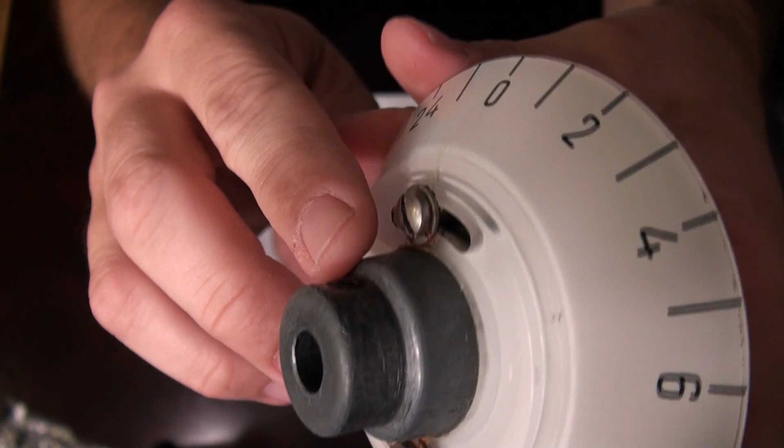But if you can see real close on this part, see if we can get it to focus, there's a lot of scratches and scoring going on there. So it looks like over time the original knob has been slipping on this part. So that's why I want to change the geometry and the machining of this part a little bit. This is more than likely cast aluminum.

So the first step for this project is we have to model just slightly this piece here so we can generate some quick CAM code to machine this part to look the way we want. And then we'll CAD 3D model the new knob that will go on here, CAM it, and machine it. So this will be our first episode. Let's head down to the office and we'll jump into Fusion 360 and start doing some CAD work.

Let's do some 3D modeling. So I have Fusion 360 open. I just set up a new file, so we got a new project going. So the first thing that we're going to do is we're going to model the lower piece, the existing piece that we said we want to modify slightly.

Now while I'm doing this, I'm going to go real slow, real methodical. I'm not going to use any shortcuts. We're just going to use all the menu bars and icons. A lot of people gave me some feedback asking for a video like this. A lot of the other videos on YouTube, the people go real fast and they have a hard time following along. So I'm going to talk through what I'm doing so you have an idea of my thought process and how I'm doing it within the CAD environment.

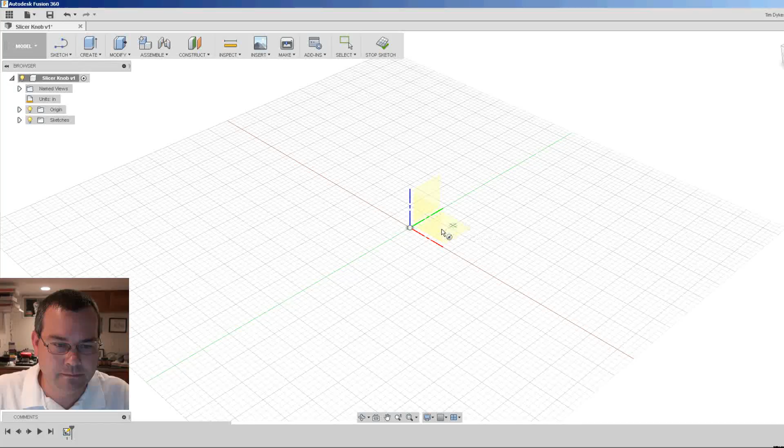So cylinder, it wants to know a plane that I want to make that cylinder on. We're going to make it in the XY plane. And then it wants to know a reference point. So I'm going to put it at the origin. Now it wants to know a diameter of that cylinder. So our diameter is 0.9 inches.

And now it's going to ask me how tall do I want my cylinder. So I'm going to draw this in the negative side of the XY plane. And then when I draw the knob, I'm going to draw the knob on the positive side. So that's why I'm doing this negative. So my first part of my cylinder is minus 0.450 inches tall. Okay, so we just made a body.

Now, once we have a body, we want to do this create component. You always want to try to work inside of a component in Fusion 360. And you can think of a component as just a mass of bodies that are glued together. Kind of like if you're building a house with Legos, the house would be the component, and then all the bodies would be the Lego bricks that are all stacked together and snapped together.

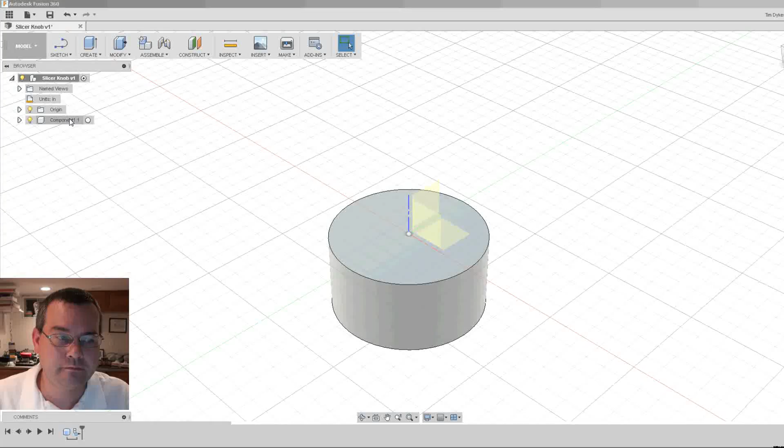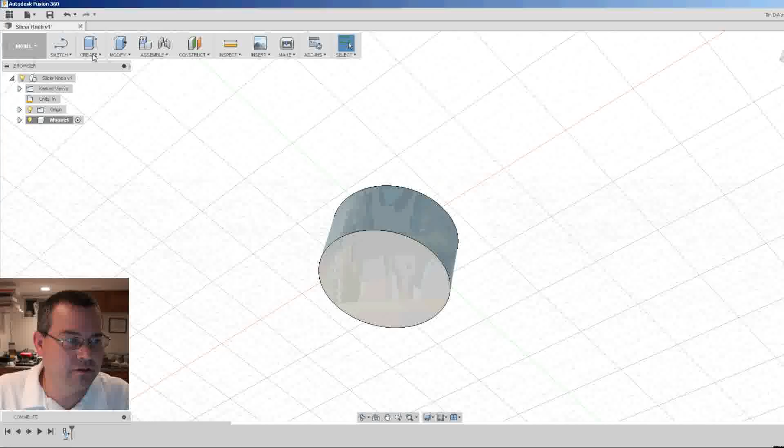So we made a component. I always like to name my stuff. So we'll call it the mount. Oops. Come on. And we spelled it wrong. Okay, so we'll call it the mount, and we're going to make this our active component. So now any changes we make will all reflect in this component. So that's the very top of the mount.

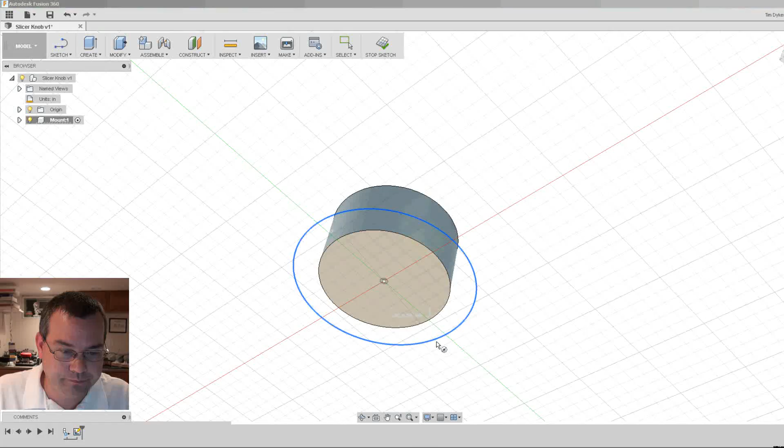Now what I want to do is I want to tack another cylinder onto it. So I'm going to say another cylinder, and I'm going to select this plane of the other part, and then I'm going to go to the center again. And then just like before, it's going to ask me for a diameter. So the lower diameter of this part is 1.25, and then again it's going to ask me for a height. So the height's 0.6.

Okay, so that's as much as I really need to model to properly represent the mount. Now, one of the modifications we're going to make is we want to put two flats, one on each side, so that we have a good way to engage the knob that we're going to make to apply torque to the shaft. That way, we don't have to have any set screws or keys or anything like that, and this will be quick and easy.

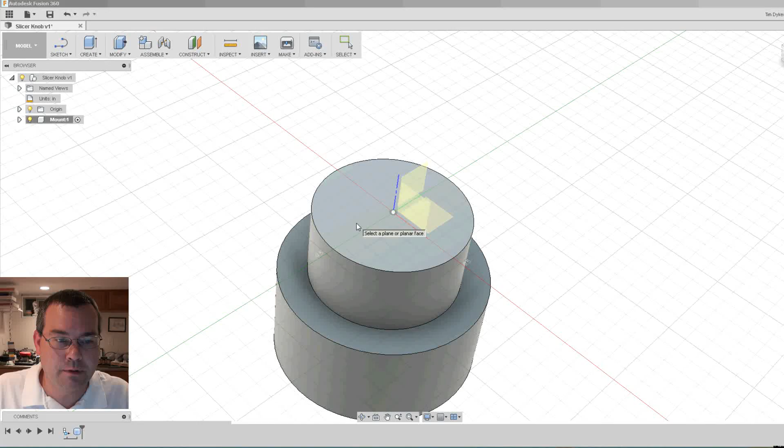So in order to do this, I'm going to create a sketch. Now a sketch, for the purpose of this part, is just a two-dimensional drawing that you can make on any plane. So I'm going to sketch on the top of this cylinder that we made. So I'm going to go to sketch, create a sketch, and then it's going to ask me what plane do you want to create that sketch on. And I can select one of the cardinal planes of the file, or I can select a plane on an existing body or component. So we're going to select this.

Now notice it kind of highlights it and changes a little bit. Okay. Now we're sketching on the XY plane, and this sketch is associated with the plane of the top of that cylinder. So we're going to draw two lines here. I'm going to draw a center line first. So I'm going to say sketch line, and there's a whole bunch of shortcuts we can use. I'm not using them on purpose because I'm trying to get people to follow a little bit better.

So then we're going to say this top edge, and then we'll go all the way down here to this bottom edge, and we're good. And then we're going to add a constraint, and the center point is now coincident. Okay, now constraints sometimes give people a hard time to understand. What a constraint is doing is you are describing some relationship from one object to another. The easy ones to understand are parallel and perpendicular. So if you have two lines, there's two ways that you can describe the relationship between those lines.

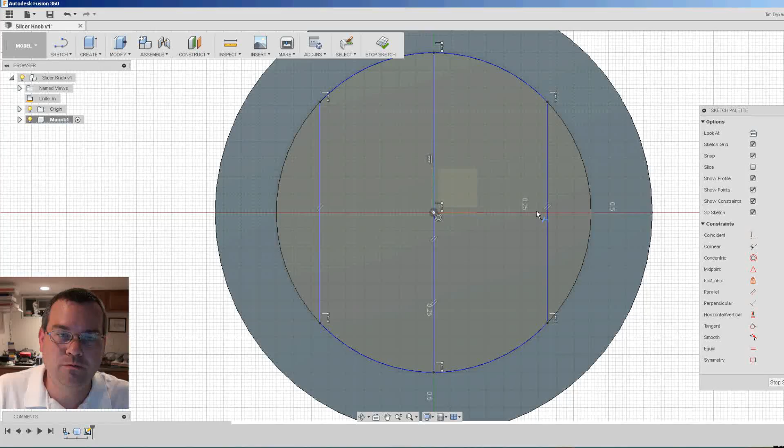I'm going to draw a circle here, and I'm going to make it the same as the other one. So sketch, we'll do a circle, and we'll just do a 2-point. We're going to select the center here, okay, and then we'll go all the way out to here. Now, the bad part about doing it that way is that if I change the dimension of the cylinder, then the sketch geometry won't change because they're not linked. So that's why we typically would use the project.

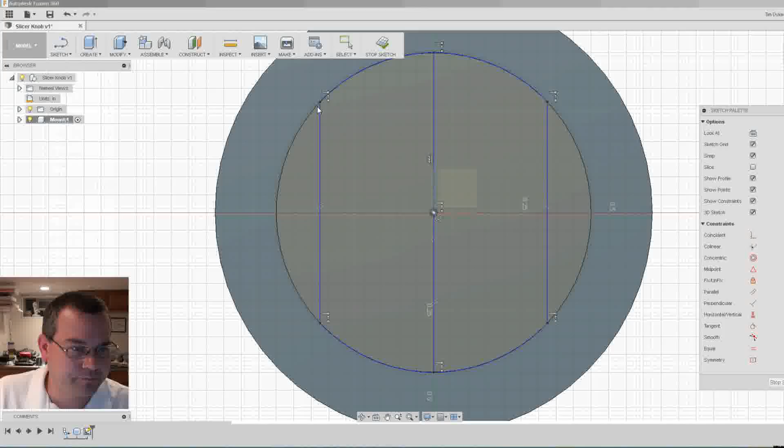Okay. Now the next thing I want to do is I just want to do some trimming here. So I want to say sketch, and I want to say trim, and I'm going to trim this line and this line, that line, that line. I'll trim this. Basically what I'm doing is I'm forming, now it's warning me that I'm removing constraints as I'm doing this. So now what I did was I generated the shape that I wanted for that piece to look like.

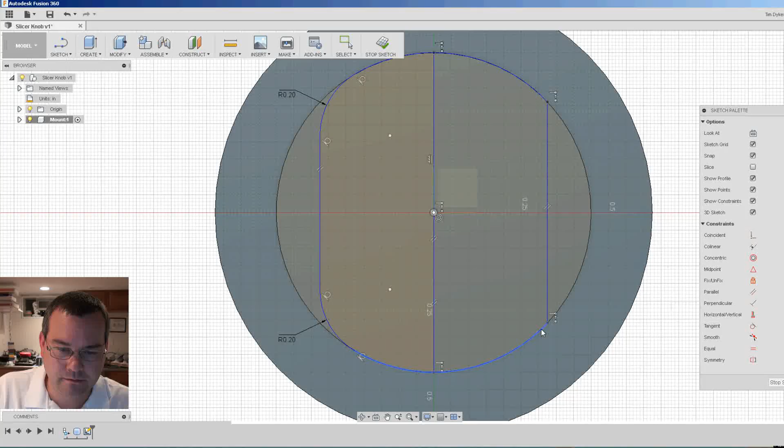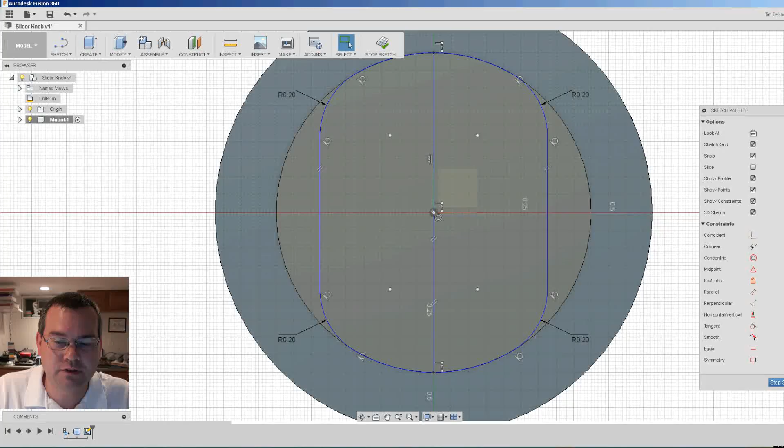Now the other thing I want to do is, because I'm going to make a mirror image of this as a pocket, I can't machine square corners inside of it. So now what I want to do is I want to say fillet, and I want to go from here to here, and then I want a fillet of, what did I say, 0.4? No, 0.2. Okay. And then we're just going to put 4 fillets on. And what I'm doing is I'm right clicking and saying repeat.

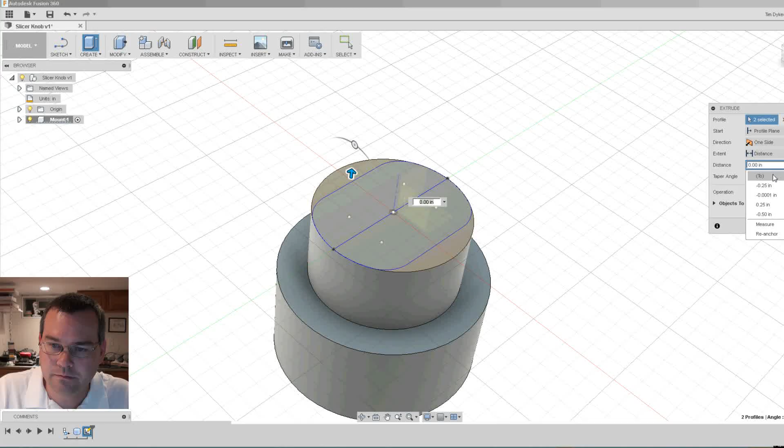And the reason why I'm using a fillet of 0.2 is when I make the other part of this, I'm going to use a 3/8 inch diameter end mill. So 0.2 will allow me to get in this corner without having 90 degrees of engagement in the tool and it chattering. Okay, so now I've got the shape drawn that I want, and this sketch is now complete. So I'm going to come over here and I'm going to say stop sketch.

Now what I can do is I can say create extrude, and I can select this, and then I can select that, and we can say cut, and then under distance we can say 2, and I want to cut it to here.

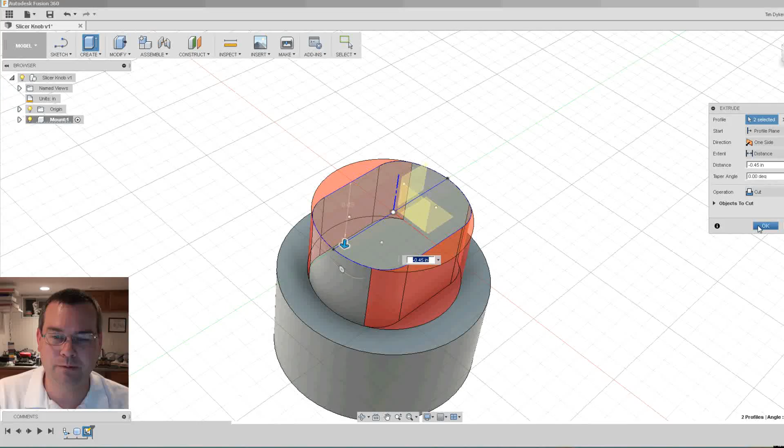Okay, now what we're doing, the first part of this part was we were adding material. We were making a cylinder. We made 2 cylinders that were put together. Now what we're doing is we're taking the cylinder that we made and we're cutting it. Now you could have done this the opposite way and drew the larger cylinder first and made a sketch on it, and then drew what you wanted and extruded it and added material. Here we're cutting it away.

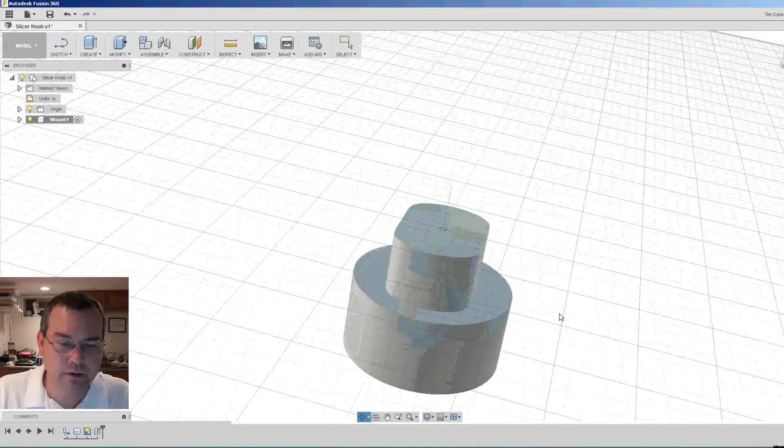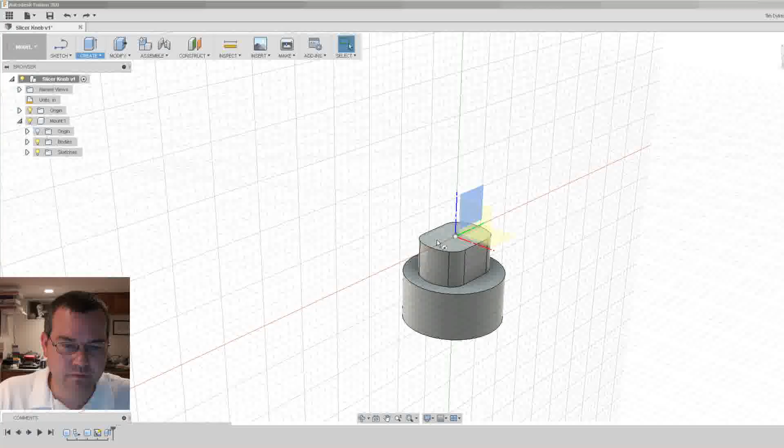There are so many ways that you can 3D model these parts, and there's no right way. There are some better ways and some not so good ways. The really good 3D modelers will make it so that you can easily change dimensions and change parts and modify parts and grow parts without having to do a lot of editing. Okay. Again, I'm just kind of trying to give you a starter and showing you exactly what I'm doing here.

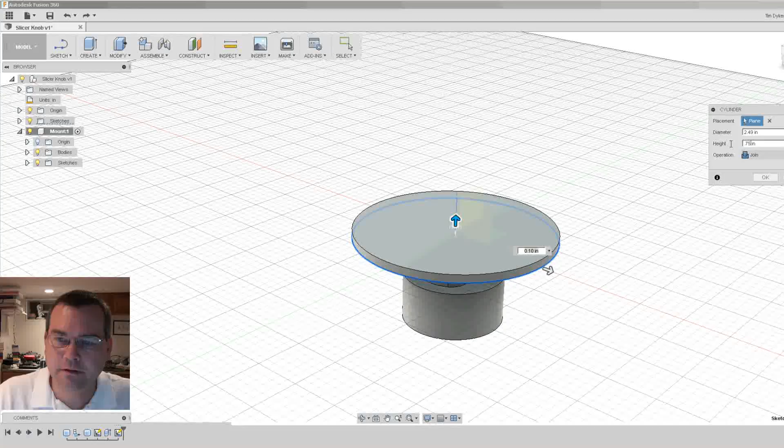Okay, so we'll do our cut. So now that will conclude the part. That is all I need to model for the knob part that this is going to mount to. And this is enough modeling where I can CAM it and we can, you know, do the machine work necessary. Okay, so that concludes the first part.

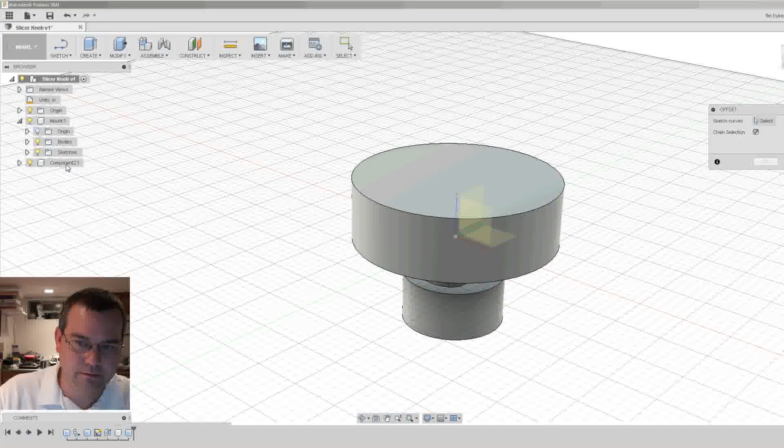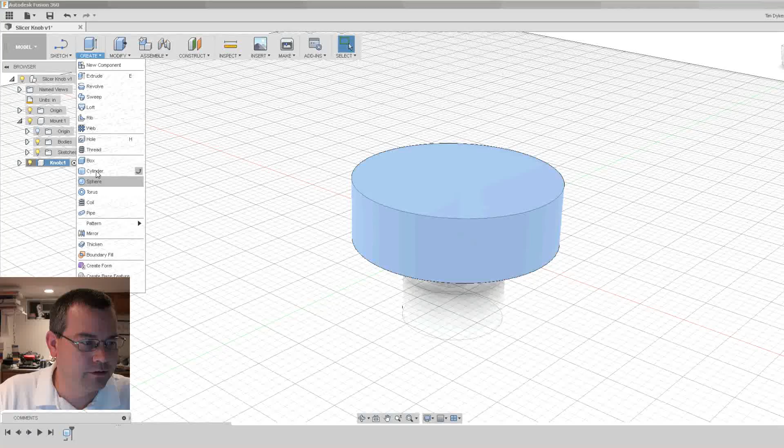Now we'll actually go and model the knob. Now this part's going to be more complex. So I'm going to start the knob the same way that I started the mount. I'm going to create a cylinder, and we'll select the XY plane again, and then I want the center to be on the origin, and then the initial diameter wants to be 2.49. Okay, and then the height wants to be 0.75.

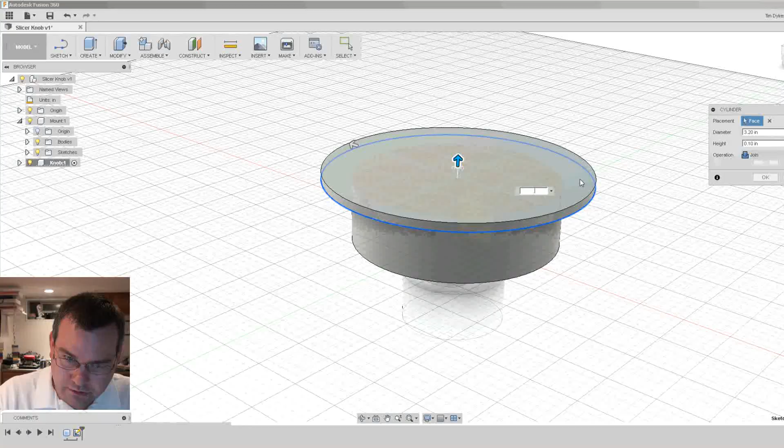And then under the operation, what I want to do is I want to create a new component. So I'm telling Fusion 360 that this is not part of the original component that we were making, the mount. This is going to be a brand new component. So click OK, and now over here you'll notice that we have a second component. So let's name our component. We'll call it knob. Okay. And then we want to make it active, because we're going to be actively modifying this component.

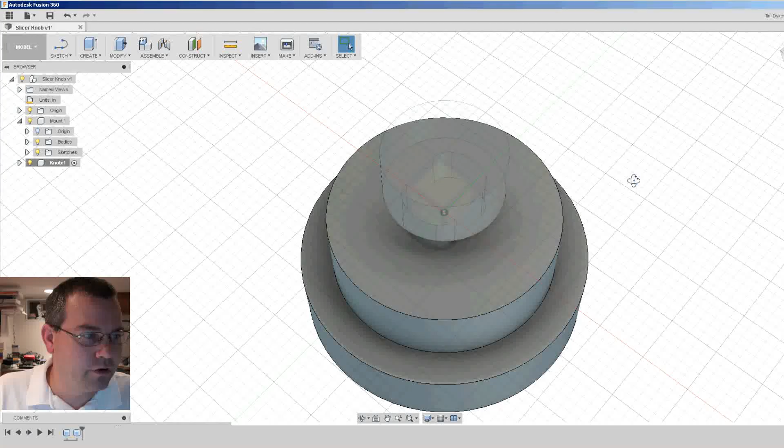So now I'm going to do the same thing I did last time and create another cylinder. This is considered direct modeling, and we're going to put it on the face of the first one and in the center. And then the diameter of this will be the total diameter of the knob. We're going to go with 3.2. And then the height of this cylinder is also going to be 0.75. So that'll give us a total knob thickness of 1.5 inches. So then there is the general outline of our knob.

Now we have to do a couple of things here. We have to fix up the bottom and make it so that it will go on to the mount that we previously modeled. And then we also need to fix up the top here and make it so that it's a little ergonomic and you can turn it easily. So let's start with the bottom first. So I'm going to create a sketch, and the sketch plane is going to be the bottom of the knob.

And then on this sketch, see how it's showing a shadow outline of the first component? That's really nice, because then what we can do is we can say P for project, and then we should be able to select the outline of this knob. There we go. Okay, and then we can hit OK.

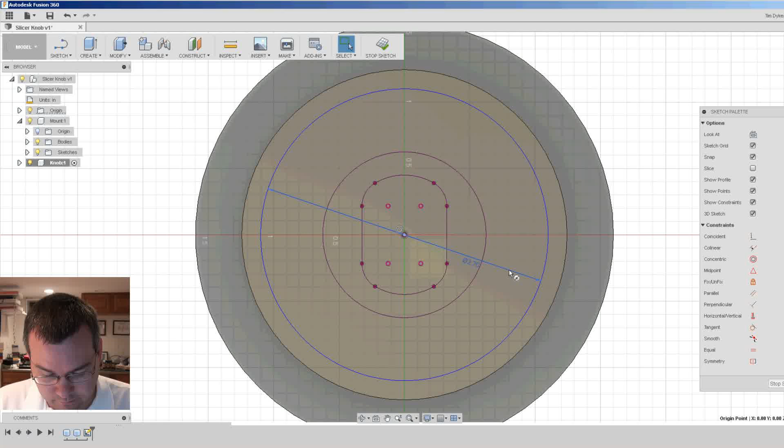So then what we did is we took the drawing of the previous part that we made, the mount, and we projected that geometry onto the bottom of our knob, so we don't have to redraw and redimension that. And if we change the original sketch and the original part, these projected lines will also change with it. Okay, so they're linked. That makes maintaining and modifying your designs much easier going forward. So that's why you want to use this project command.

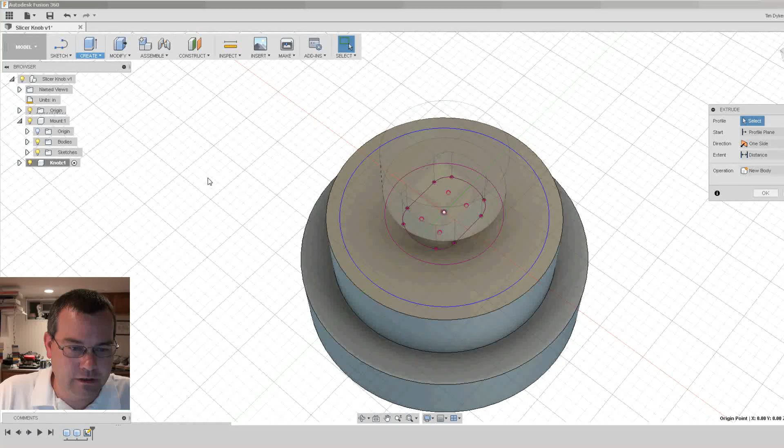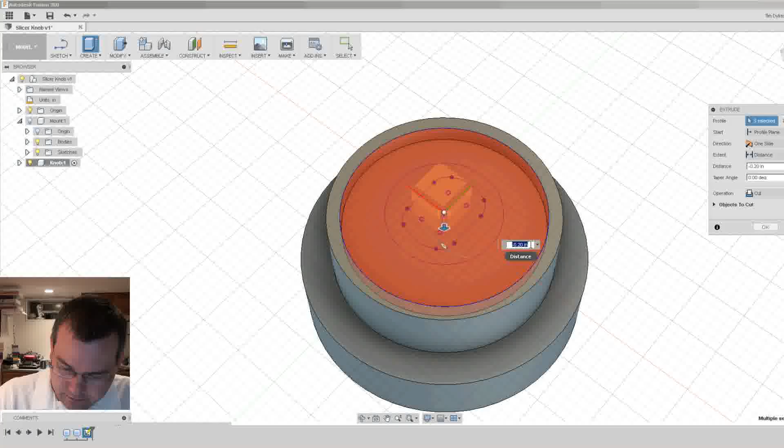So then once we have that projected, that's part of it, and we also have to put a very large recess into this knob. So we'll make a circle, 2 point, and we're going to put it at the center again in the origin. And then the diameter of the recess is 2.2 inches. And then this will make it so that it slides over the lip that's on the mount, so that it'll mate nice with it. Let me just double check that dimension. Yep, that gives us a little bit of clearance.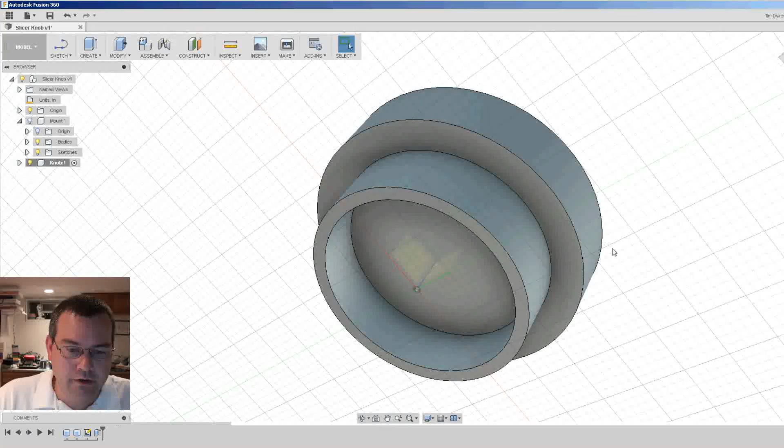Okay, so that's about it for this sketch. So the bottom is pretty easy. You can see how projecting made our lives easy. So now, once we have this sketch, we're going to do another extrude. So create extrude, and here, let's make this component disappear. We want to extrude the whole piece, and we're going to cut. And we are going to cut a dimension of 0.625.

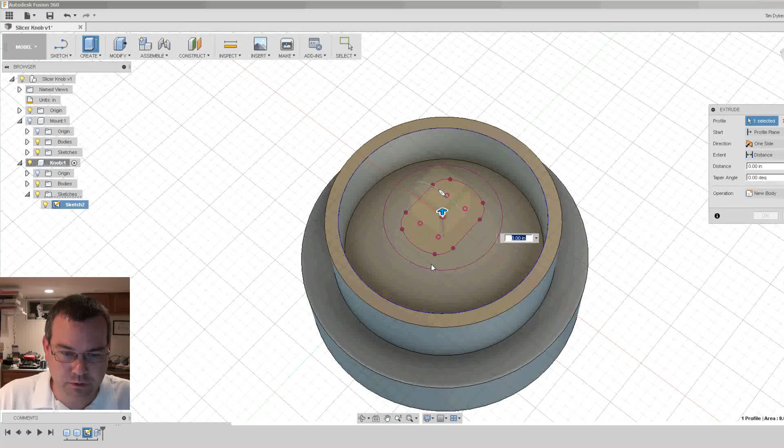Okay. Now what that will do is that gives us the recess for the two set screws that hold on the plastic indicator with the numbers on it. That holds it on to the mount, the metal mount part that we're going to machine. So now once we do that, if you notice, the sketch disappears.

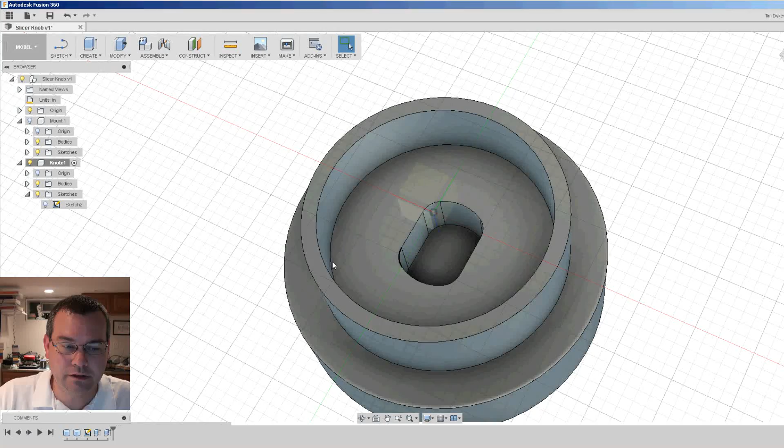Now we still want this sketch because we need to do a little bit more work on it. So if you expand down here to sketches, you'll see that we have the sketch here. We can make it show back up by turning it back on. And now we want to extrude this part here. So let's do another extrude. Create extrude. And now we only want to extrude the center part.

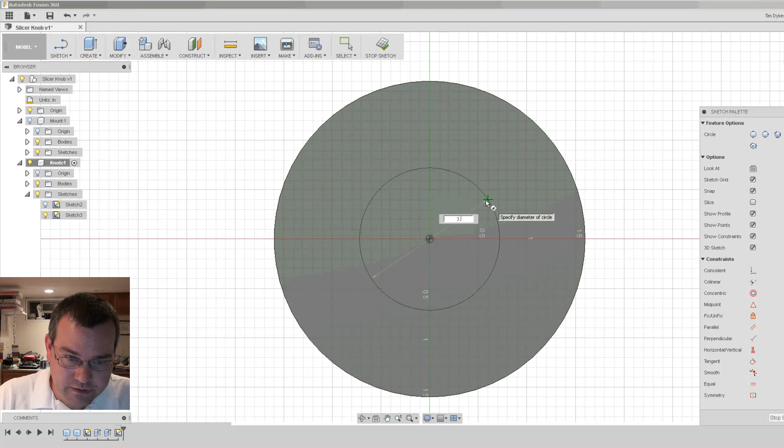Now, you got to be careful of your measurements here. We're extruding it based on this bottom surface here, not the first extrusion. So this one needs to go down minus 1.125 inches. Okay, so you can see now how we can turn this sketch off so that we can see just the body. So you can see how very quickly we can transfer the geometry from one part to another without having to redraw it at all.

And then with the radiuses that we put in here, we'll be able to easily come in here and take this pocket out with a nice 3/8 inch end mill. We'll be able to reach down in there. Okay, so that's pretty much it for the back side. So now let's do the top. Okay, so I'm upside down on the top, so I want to turn the part around so I'm right side up. This makes life a little easier.

Now I'm going to do another sketch. We can do as many sketches as we want, and you can put them on all different planes. A lot of people have trouble doing angled holes when they're first starting out. That's where you have to get creative and make what they call construction planes. And then you can make a sketch on that construction plane at any angle. It can get pretty complex. We're just going to sketch right on the top of the part again.

And then here's where it gets a little complicated. So I want to put a nice number of scallops on the OD of this knob. So the first thing that I want to do is I want to draw a circle. So we'll sketch circle. We want to lock it to the center. And then this circle, I already figured out all its dimensions ahead of time. This wants to be 3.6. Okay. So now that's our circle.

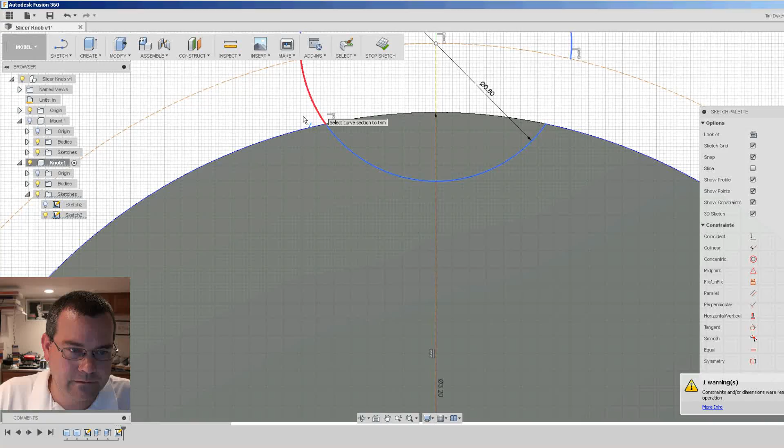And then what I want to do is I'm going to draw a line just as a reference from the center of the circle up to the upper edge of the circle. And then notice it automatically put constraints in for me, so it centered it, it made it vertical, and then it made it coincident. So that gives me the starting point of where I want my scallops to start.

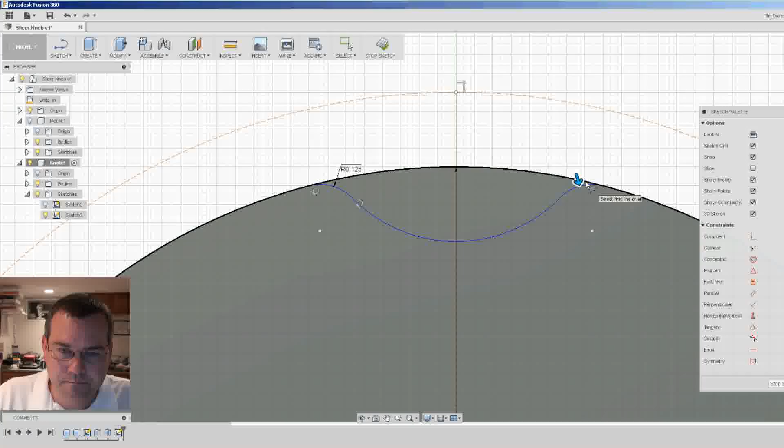So now I want to do another circle. So we'll go over here, we'll say circle, and this circle I want to be right here, and I want it to be 0.8 inches in diameter. The reason why I want it to be 0.8 inches in diameter is I want to use a 3/4 inch end mill to carve out these little scallops, and it's always good to make your diameters a little bit larger than your end mills so you don't bite in and chatter when you hit the corner.

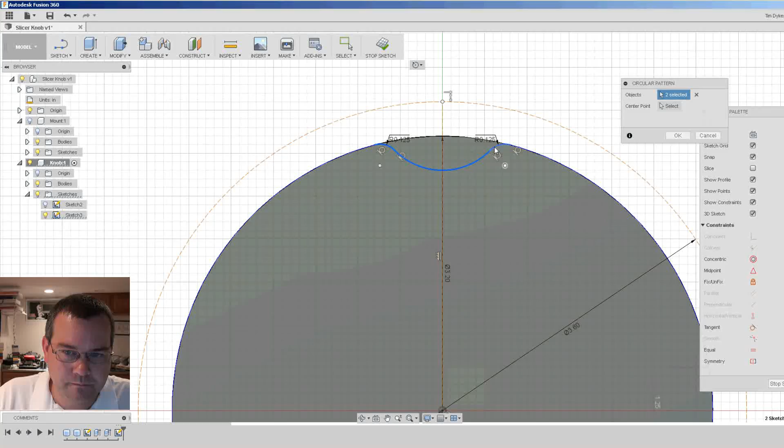Okay, now I want to make this circle a construction line, so I'm going to right click on it and say construction line. When you make something a construction line, it doesn't affect the selections when you do extrudes. Okay, so we're also going to make this a construction line. Okay. We're going to draw another circle here, and this will be the same as the outside diameter, 3.2 inches.

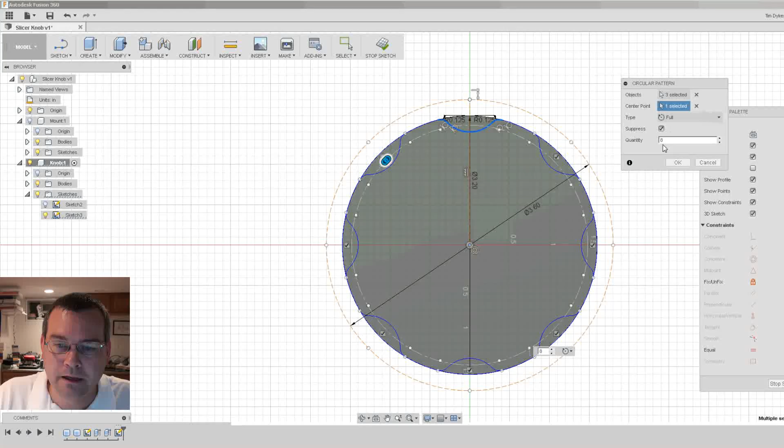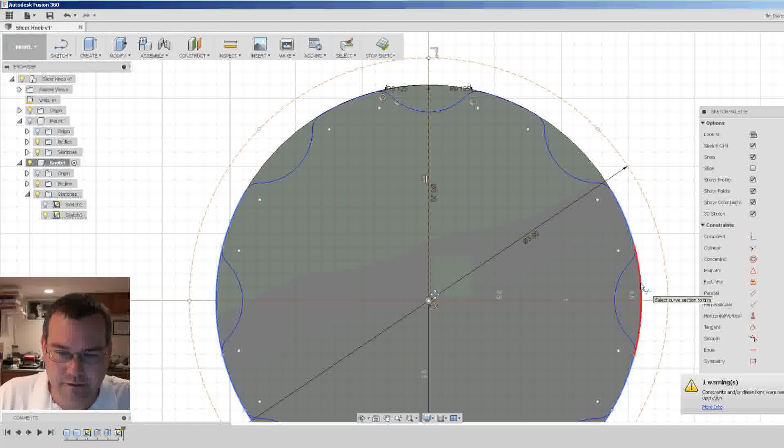And then we're going to do a little bit of trimming here. We're going to trim this guy, and then we're going to trim this guy. Okay, so now we've got our scallop formed. Now we also want to add a fillet to it, just so that it feels nice on the hand. Select our first, select our second, and then we want these to be 1/8 inch radius, so it looks real nice. So then we'll say repeat fillet.

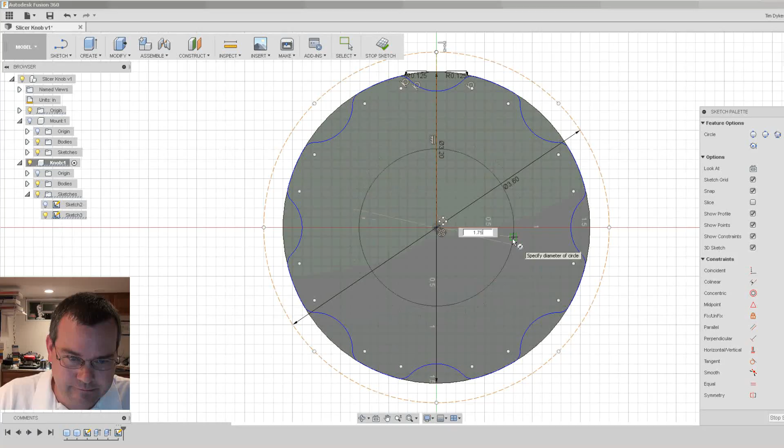Okay, so that's a nice little scallop that your finger can rest in to turn this. Now I want to do 8 of these total around. So then what we'll do is we'll go to Sketch and we'll say Circular Pattern. Now it's going to ask me to select the objects. So I want this guy and the 2 fillets. Okay, so I got 3 items selected, and then it's going to ask me for the center point. I want it to be the center of my circle, and then it wants how many I want, and I want 8.

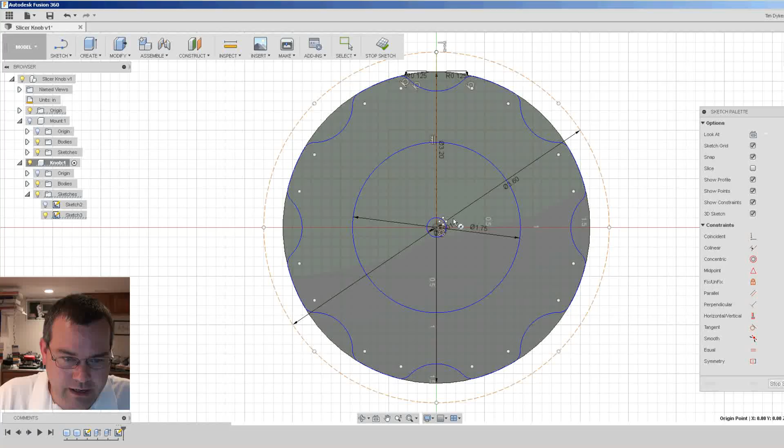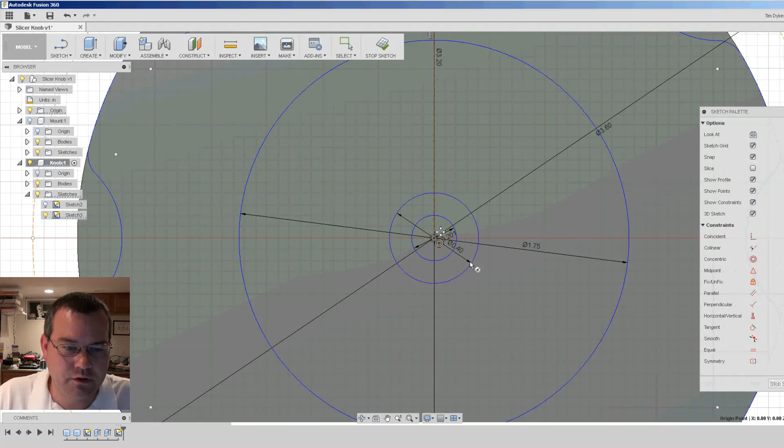Okay, so that will give a nice scallop knob so that you can grab it, turn it, get a good hold on it. If you're wearing gloves, or if you've been handling a lot of meat and you got a little bit of grease on your fingers, they're not going to slide off. Okay, so then we'll click OK. And that is how we can very quickly and easily replicate a bolt pattern or any type of circle pattern.

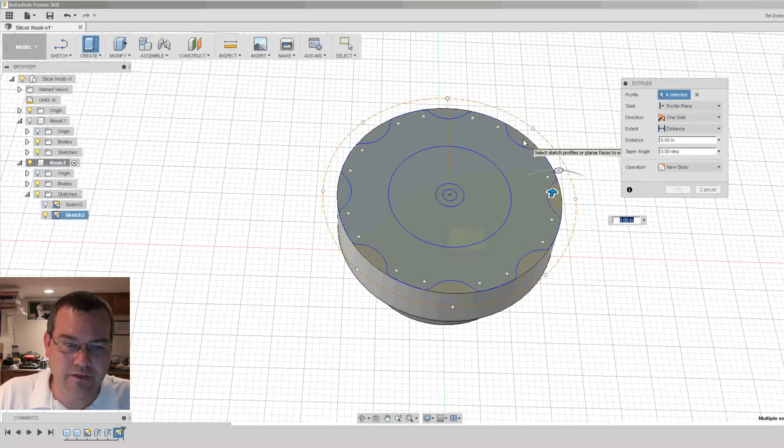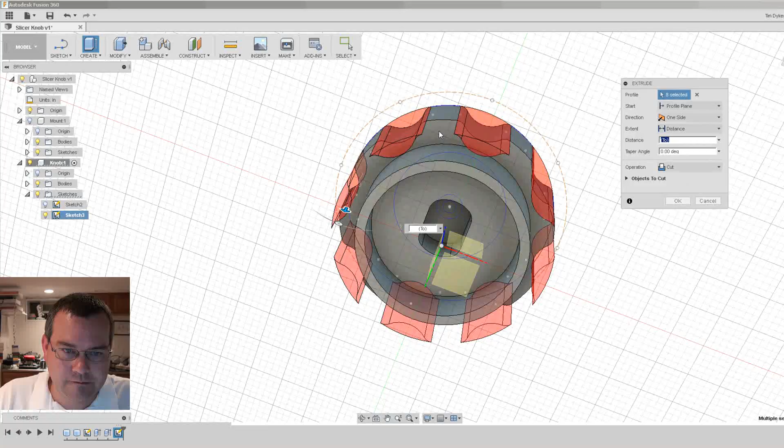So now I'm just going to trim out the little pieces of circle that are left. Okay, I think we got them all. Okay, so that's the outside dimensions of the knob that we want to do with all our scallops. Now I also want to just create from the center here and just do a nice little recess in here just to make it look nice. Let's try maybe like 1.75 inches. Yeah, that'll make it look a little cool.

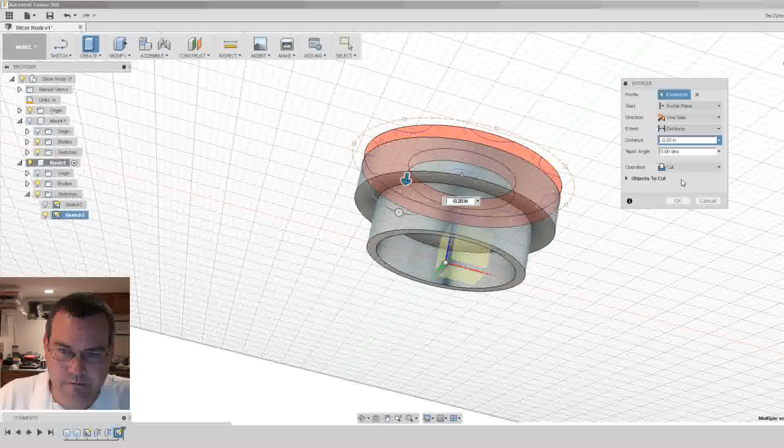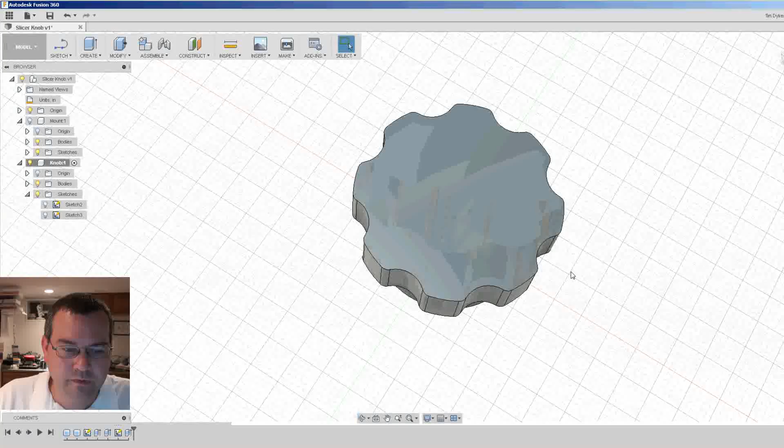And then I'm also going to draw a hole here for the mounting screw. So again, off the center, and then this hole is going to be 0.2 inches, a number 7 drill. It's actually 0.201. We'll use a number 7 drill for that. And then we're going to create another hole. And this will be a little bit of recess for the screw. And then this one is going to be 0.4 inches. Okay, so that'll just provide a little recess for the screw head in there.

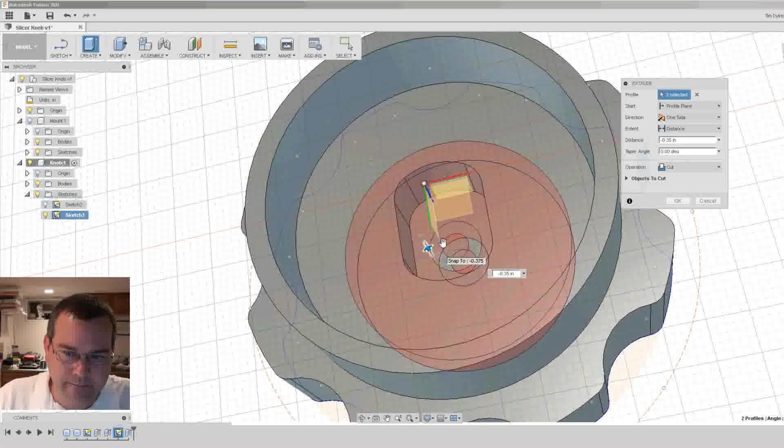Okay, so now the sketch is complete. So we can hit stop sketch, and now we're going to do all of our extrudes. So we'll create extrude, and I want to extrude all of these. And again, you can do this the other way of create a sketch and then extrude material from that sketch. In this case, it might have been easier to extrude it out rather than cut it. And we'll say cut, and then the distance we'll say 2.

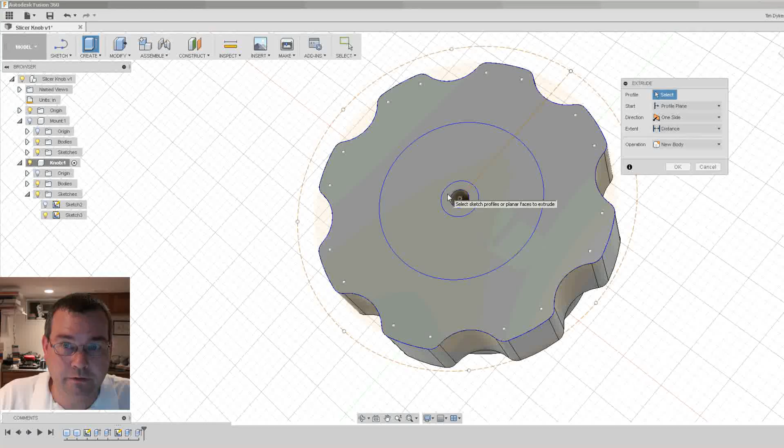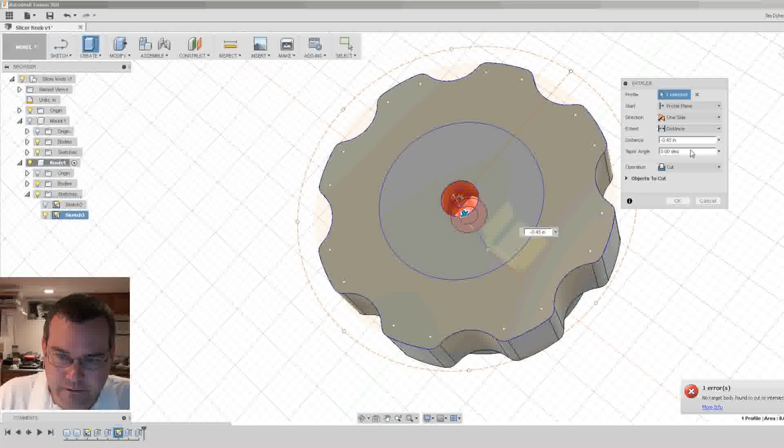Fusion doesn't want to catch up with me. There we go. Now it's selected the center. There we go. Okay. So there are our extrusions for the scallops. And again, we got nice radiuses on there, so it'll feel real good in the hand.

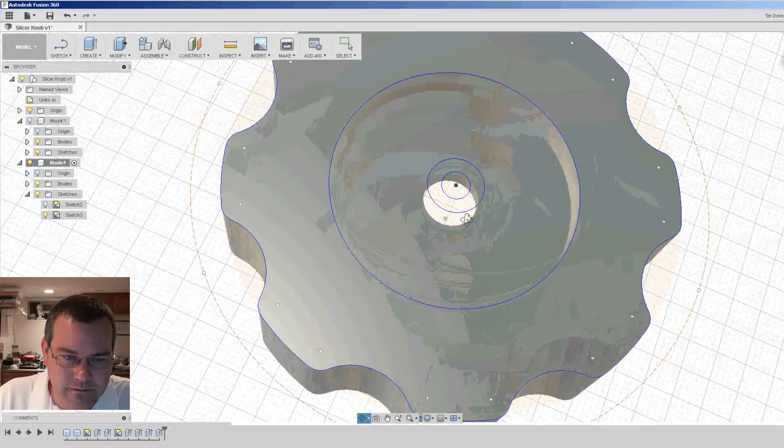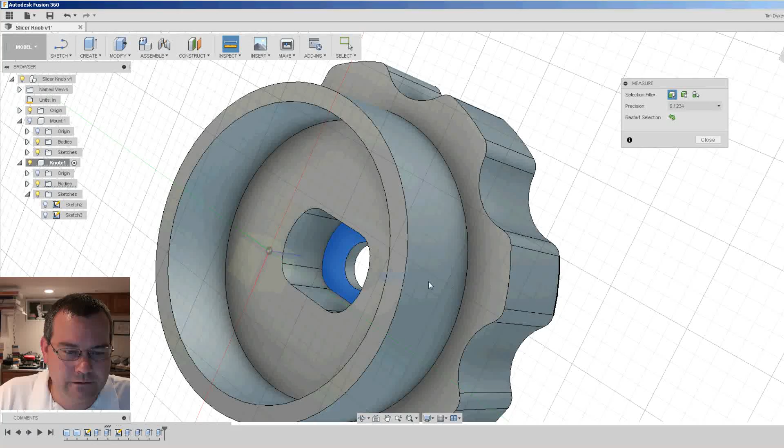Okay, then we're going to just extrude the center out. So the very center, we want to go all the way through. So we'll say 2. And the operation is going to be cut. Man, Fusion just is not happy with me tonight. There we go. All right. So there's the center for the screw hole.

And then we'll do another extrude.

Sorry if this is getting boring. Everybody asked for a detailed video, so that's what I'm doing.

So this one's going to be 0.45. Oops. Minus 0.45 to make a cut. And then the last extrude, if I did all my math right, should be this one. And we want this one minus 0.25. Nope, I didn't do that one right. So clearly, this extrude is too deep. Either that or else I didn't do my math right.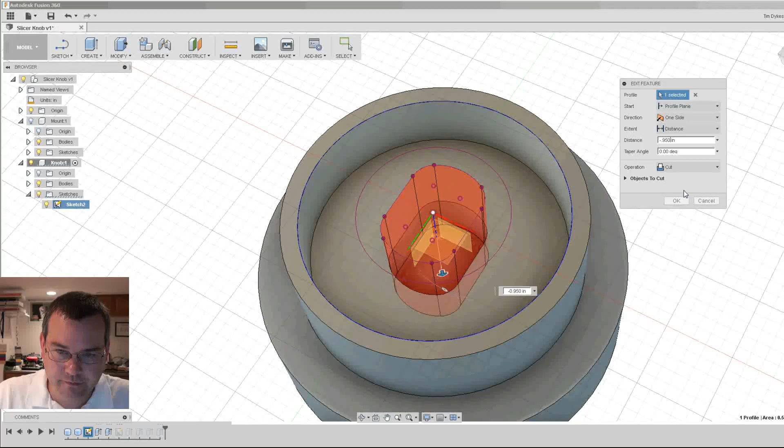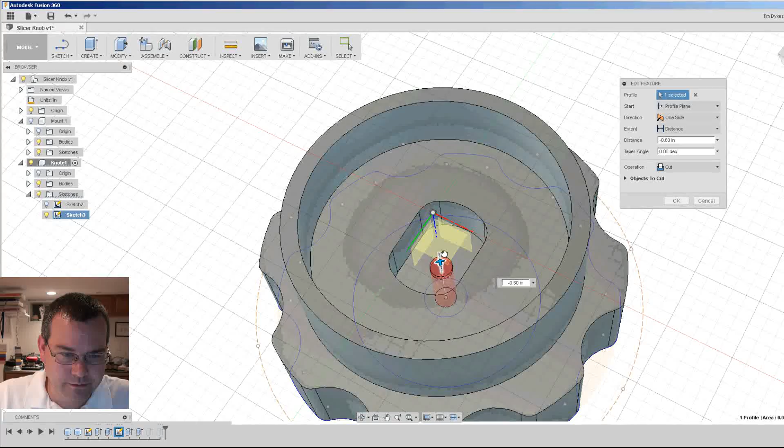So let's measure, and we'll measure from this face to this face. Oops, sorry. Wrong face. We're going to measure from this face to that face. We should have 1/4 of an inch. We only have 1/8 of an inch. Okay, let me figure out my math and I'll get back to you.

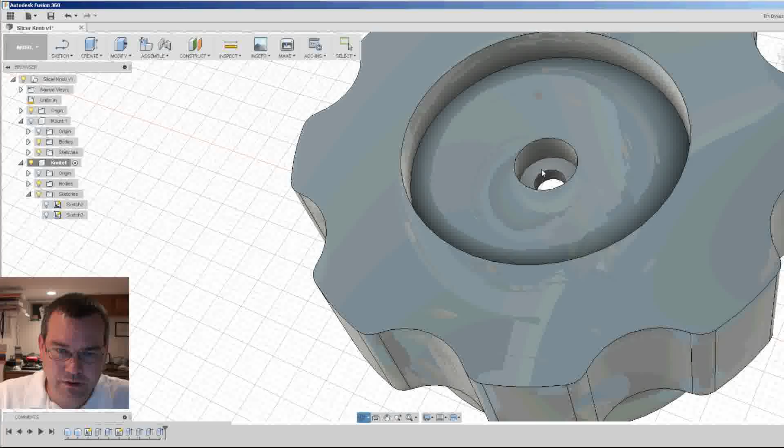Okay, I figured it out. I made this extrusion too deep. So this is good. I can show you how to edit one of the features you did. So down at the bottom, we've got this timeline. This timeline is really cool. So we can highlight and you can see that it lights up the different operations. So this was the extrude that we did to make that hole. So we're going to right click on it and we're going to say edit feature.

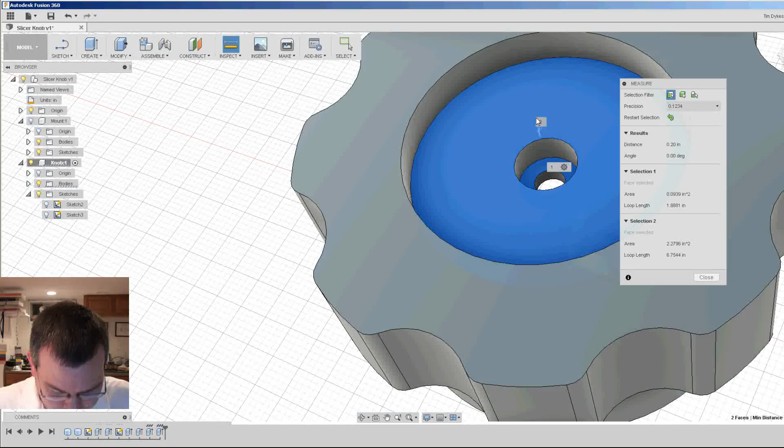Now here's another bug in Fusion. Sometimes the edit feature is grayed out. If you simply just click somewhere in the field, not on something, and then highlight it again and select it, you can say edit feature. Oh, and it works. So we did this to minus 1.25, and that is the wrong dimension. It should be minus 0.950.

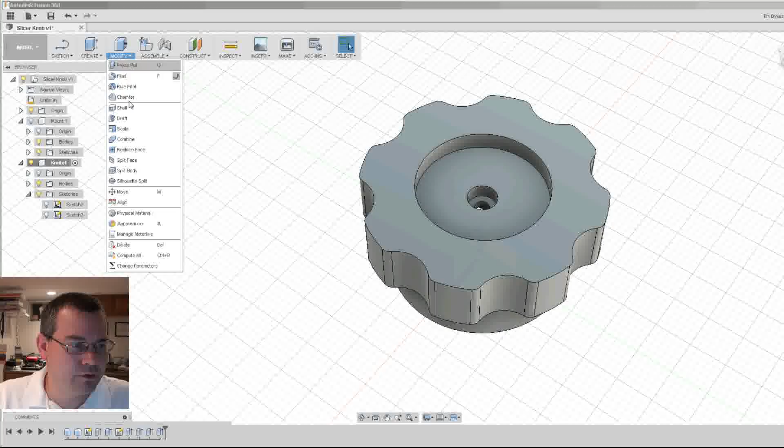Okay, so you can see it's a lot shallower now, and then our hole's not all the way through anymore, which it should be because we did it 2. So that's this extrude. So let's edit this guy. Oh, there it is again. So okay, and then we'll do... it didn't even do 2 anymore.

Okay, well, we'll just leave it at a number that's large enough to poke the hole all the way through. So then there's our hole. That looks better. So the small hole's for the screw, and then this little bit larger hole is for the screw head, just a countersink.

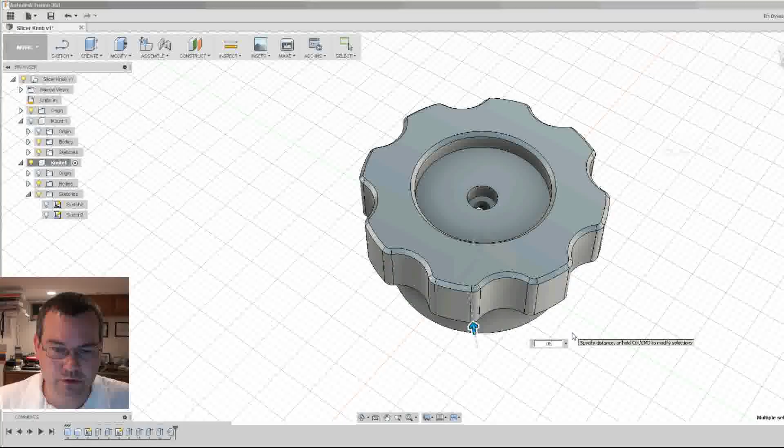And then we can do another measure, and then we can select this lower face, and then this upper face, and we get 0.2, which is the dimension we want. So that's tall enough to hide the entire head of the screw and then some. Okay.

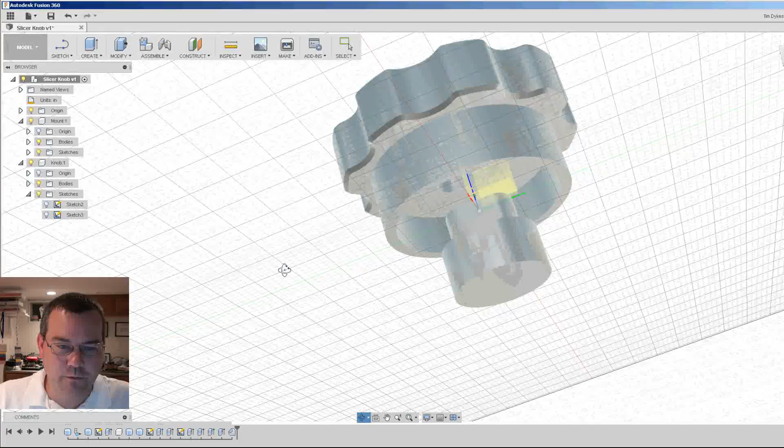So that's pretty much it for our knob. You can see how you can very easily and quickly 3D model this. And now once we have it 3D modeled, it's just a matter of generating the CAM code for it.

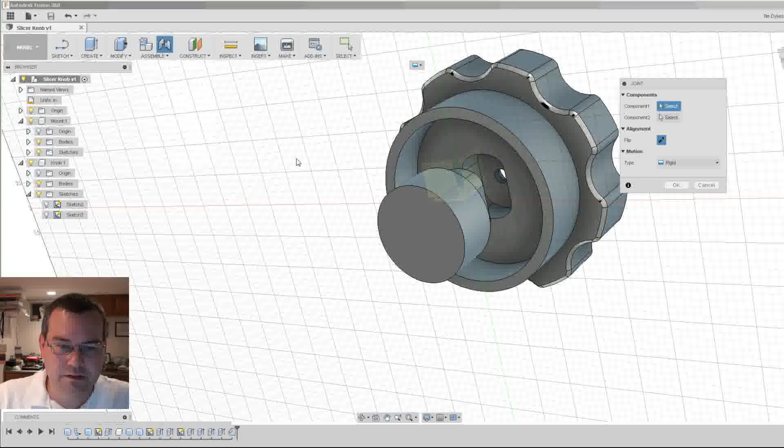Okay. Now the one thing that I do want to do, I will chamfer all of these edges down here with just an edge break while it's in the machine. But again, if you saw some of my last videos, I explained some of the issues with the chamfer tools if you actually model the chamfer. So I'm not going to model any of these edge breaks. But however, I do want to put a pretty heavy chamfer on these edges here.

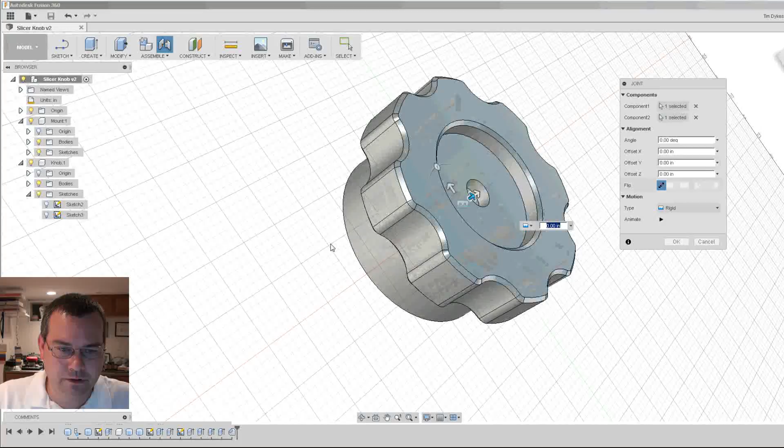So let's go to modify, and then we'll say chamfer. Now it says select edges, so we'll select that edge, and we'll select this edge, and then also let's select this lower edge. So these are all the edges that are critical to the part. We want to make these nice chamfers. So let's put like a 50 thou chamfer on them, and that just makes it look a lot nicer, and then it will be really nice on the hands. You'll get a nice smooth edge.

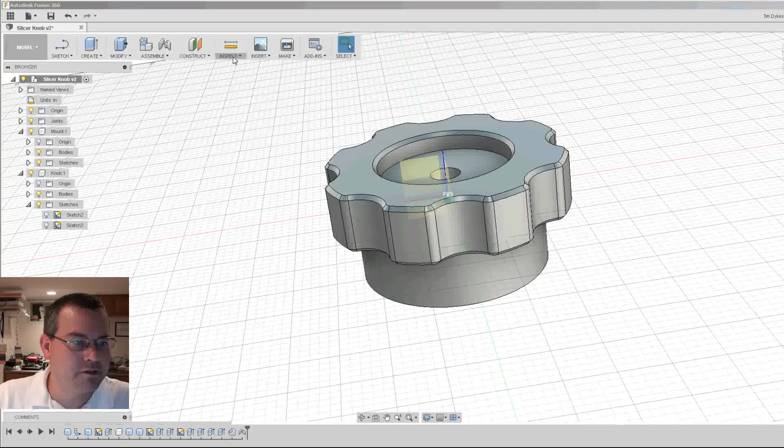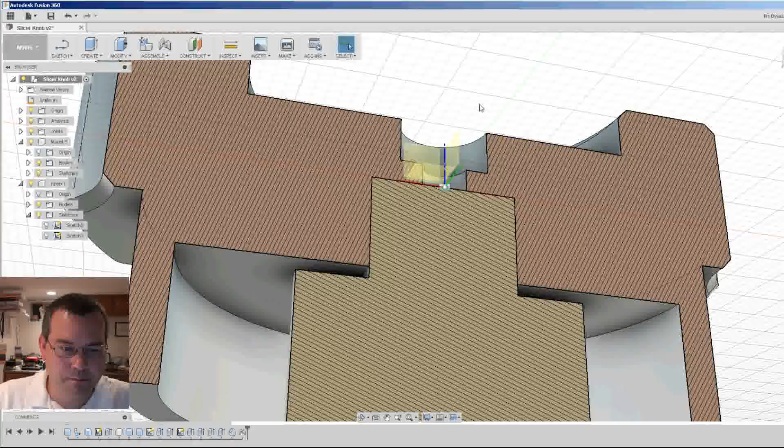For knobs, I would normally put a radius on this. I just don't have a radius tool right now that would look right. I have really small radius tools, and I have some really big radius tools, but I don't have a nice intermediate radius tool. So we're just going to use a chamfer for this part. So there we go. That is the completed part. So there's our knob, and then we can turn back on the mount, and then there's the completed drawing.

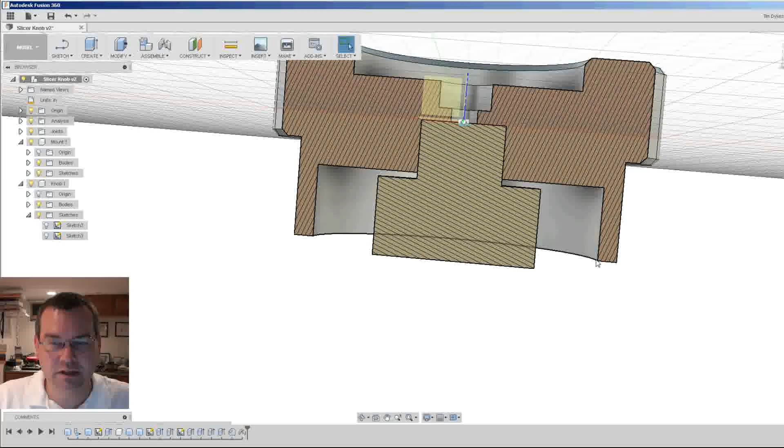Now if we wanted to, we could make a joint and then interface the lower mount with this part, but because we used a projected sketch, we know it's going to fit. We could check the height. Let's do that. Let me do a save. And then what we'll do is we'll do a joint. So we'll do an assembly and we'll say joint, and then it's going to ask for component 1.

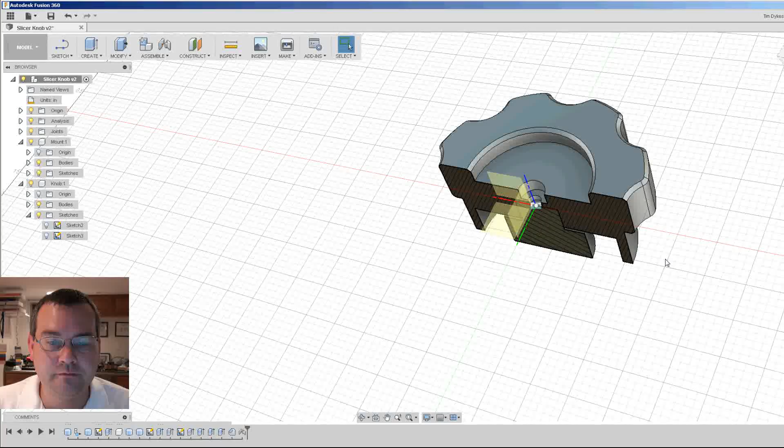Component 1, we will select this face, and we want this center point. And then for component 2, we want that face and we want the center point. Okay, so now it's putting them together. Okay, and we'll just say a rigid joint because that's what it is.

And now, if you're curious on how your parts are fitting together, we can do a sectional analysis. So we can do inspect, section analysis, and then it says select a face, but you can also select a plane as well. So we'll select this plane, and then there's our sectional analysis of it. So we can hit OK, and now you can see how our pieces are fitting together.

That's going to wrap up this video. In the next video that we make, we'll do the CAMing of this part, and we'll go through all the steps and the tool paths and the tools. So it'll be just like this video, step by step. You know, if it's a little bit boring, you guys can fast forward it. If you've never done this before, you can kind of see the thought process and how the different tools and functions are used. Okay, so thanks for watching, and we'll see you in the next one.